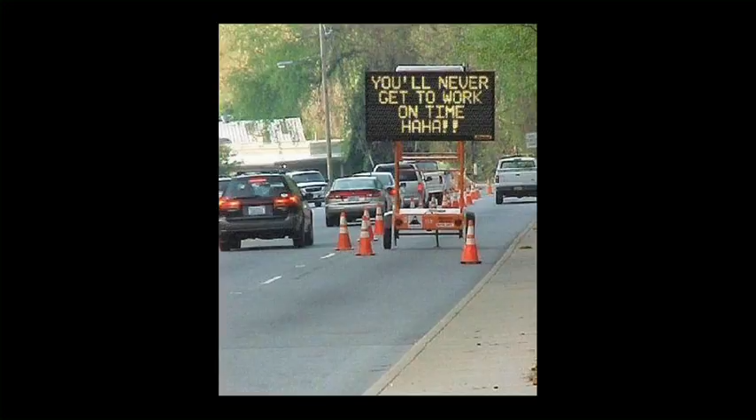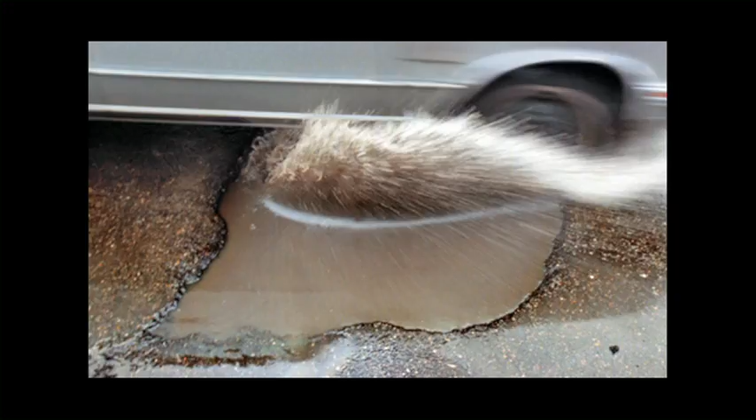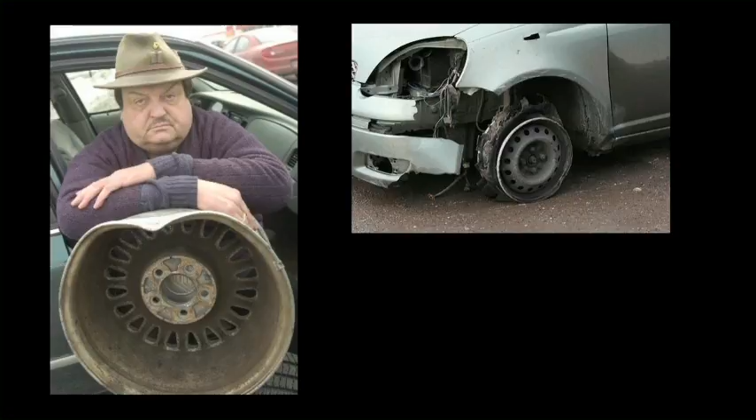Up until 2009, there had been a couple of fairly high-profile claims against road authorities for potholes - damage to vehicles, accidents on bicycles, things like that. But it was a fairly lengthy court procedure to go through. I think in 2009, 2010, where the damage was more tires, rims, some minor vehicle damage, people realized they could claim from municipalities, road authorities, and the claims started coming in. The authorities were suddenly saddled with all these claims, and they admitted responsibility in many cases and didn't even argue - just paid up.

Not at all. We have seen in literature that the UK, for instance, and Australia, over the last couple of years have also experienced extensive development of potholes, and in monetary terms far more than we actually need to put in to repair them. So it's not unique, but it's a legacy of cutting back in funding over the years in terms of preventative maintenance. If you Google potholes, you get quite a few million hits immediately, but they tend to be predominantly from America and Europe. And the origin or cause of potholes in those environments is somewhat different to ours.

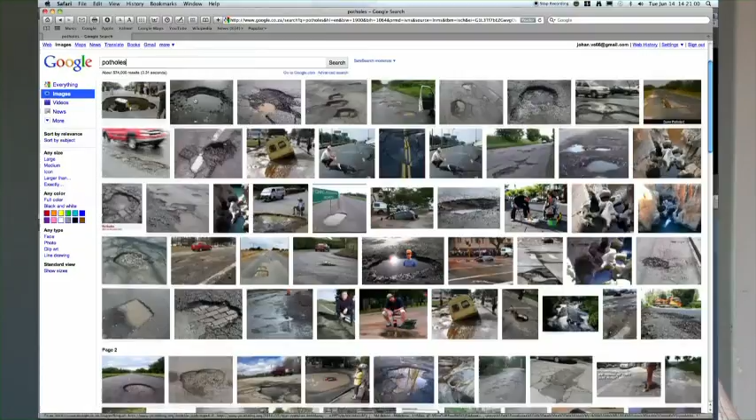There, where you have the so-called spring thaw at the end of winter, when the frozen water in the road starts thawing out, it affects the road, softens the material, weakens the road, and heavy loads on that type of material lead to potholes. That's not the kind of pothole we get in South Africa. The whole road network, right from the early 40s, 50s when they started paving it, we use much thinner asphalt and thin chip seals, or spray seals as they're called. In Europe, it's not uncommon to have 100, 150 millimeters of asphalt surfacing on a road. Here, the maximum would typically be about 50, often 25 to 40. So our pavement structure is very different, primarily because of the drier, warmer environment - we haven't got the cold conditions in winter.

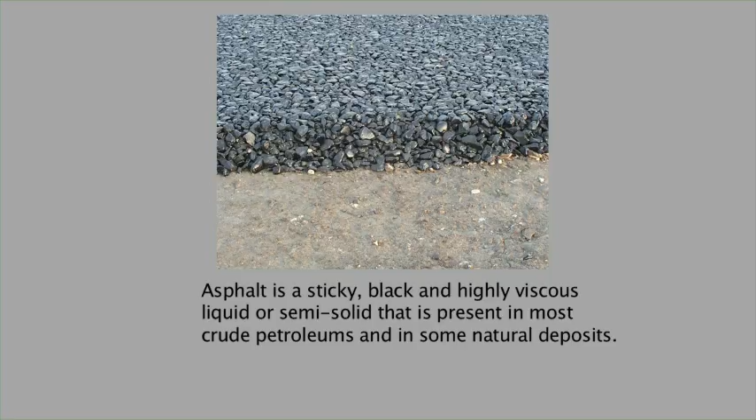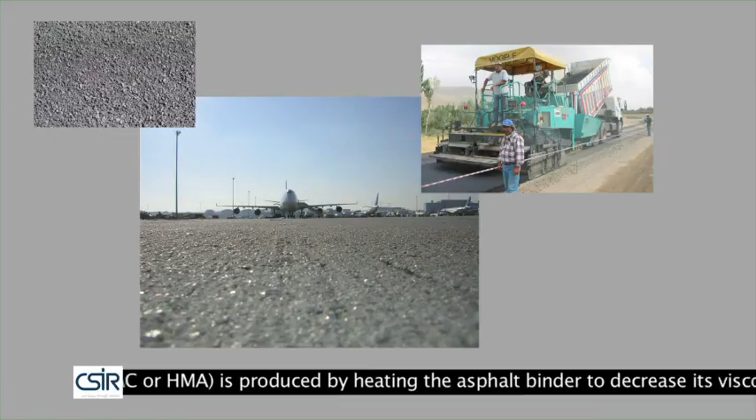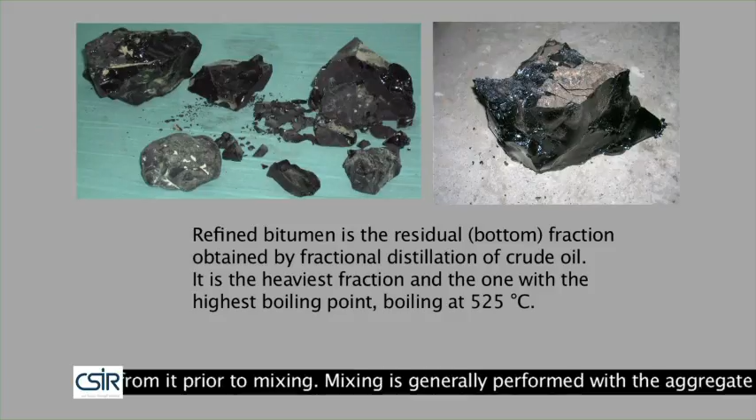Asphalt roads are paved with a mixture of stone and bitumen, and there can be two kinds. There's asphalt, which is made in a hot mix plant at high temperatures and placed in the road at high temperatures - a combination of usually aggregate, sand, bitumen, and some cement or lime or something. The other kind of paved road is the thin bituminous surfacing, where you spray a layer of bitumen on the road, put stone on that, roll it in, and that's basically it. Sometimes you can have two different size stones to make the seal.

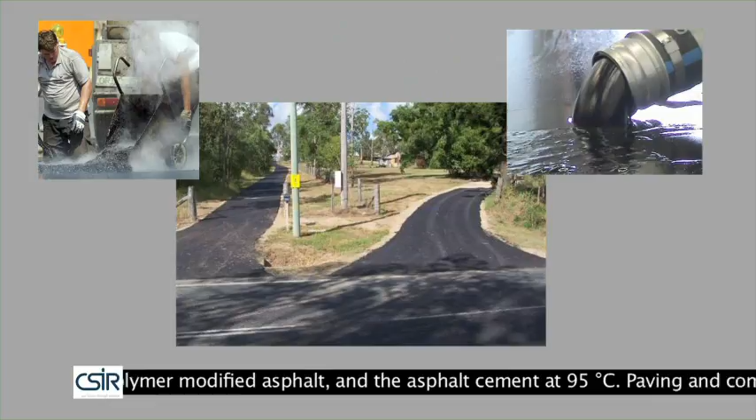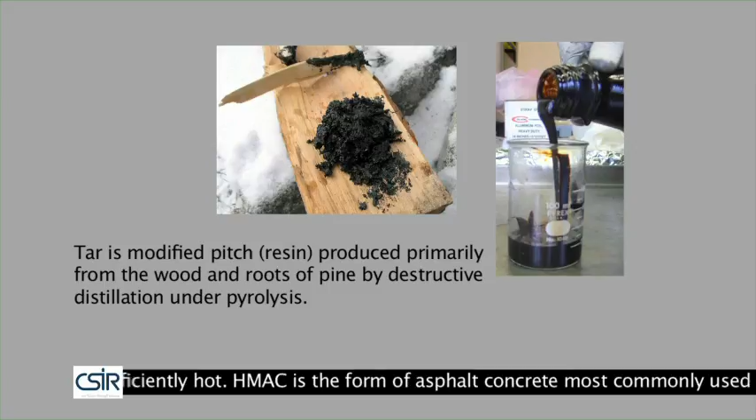Tar we don't use anymore - it's basically banned for use on roads in South Africa. It is carcinogenic. It's derived from coal, whereas bitumen is derived from oil - that's the main difference. And then concrete roads: in South Africa, we've probably got maybe 4 or 5% maximum of concrete roads, a totally different process, which is cement, aggregate, and sand mixed together.

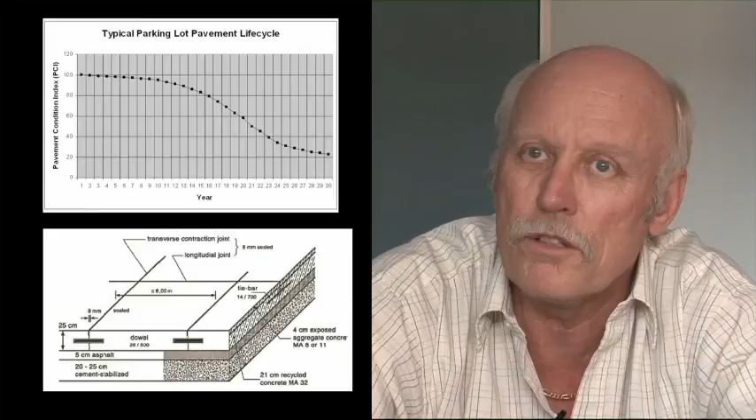A good asphalt road is designed to last for probably 12 or 15 years with minimal maintenance, if the pavement layers are correctly selected, the materials, the pavement balance is right, the asphalt is right, and everything's constructed properly.

If they're not maintained, the asphalt starts drying out and shrinking. It goes from the darker blackish color to gray, and becomes stiffer as the bitumen volatiles evaporate. It gets stiffer, which allows it to deflect more under traffic, and generates fatigue cracking from this repeated bending up and down. That's the cause of cracking in an asphalt road, which ultimately leads to potholes when water gets in the cracks.

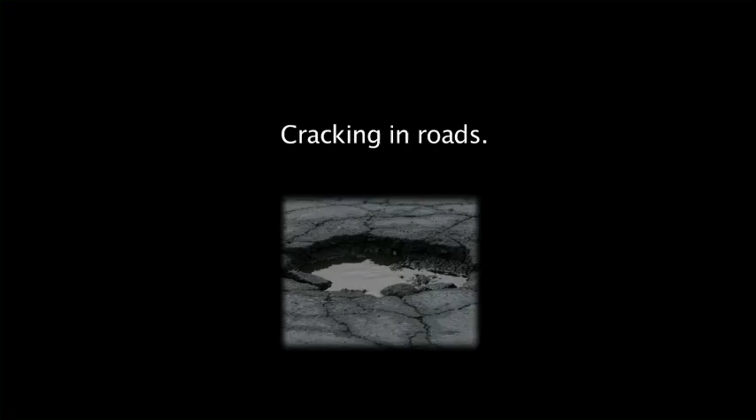There's a whole lot of different ways that cracking forms in asphalt. Obviously, one of them is if you've got poor drainage. Next to the road you get ponding of water. It could be from irrigation or seepage from a stream or dam, or even often in informal settlements, just the general drainage ends up seeping into areas next to the road.

If that water lies there, it can soak into the road, the structural layers beneath the asphalt, weaken those layers, so your deflection under traffic is even higher, so the fatigue cracking is quicker. It's really like bending a wire backwards and forwards. You bend wire, it gets hotter and hotter, and eventually it'll break. That's what happens to a road.

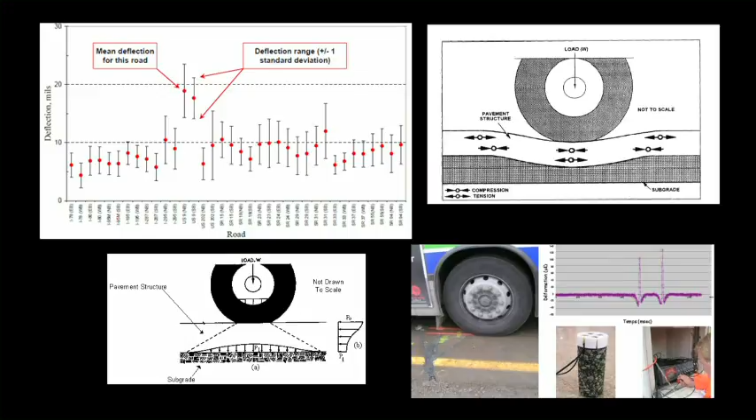Under every vehicle, there's some kind of vertical movement. A really good strong road may be 0.2 or 0.3 millimeters. Other roads may be 0.8, 1 millimeter. We've measured even 2.5 millimeters in some very light pavement structures. As a vehicle goes across, the effect of that movement on the bitumen or asphalt is exactly like the effect on a wire, and ultimately it will crack.

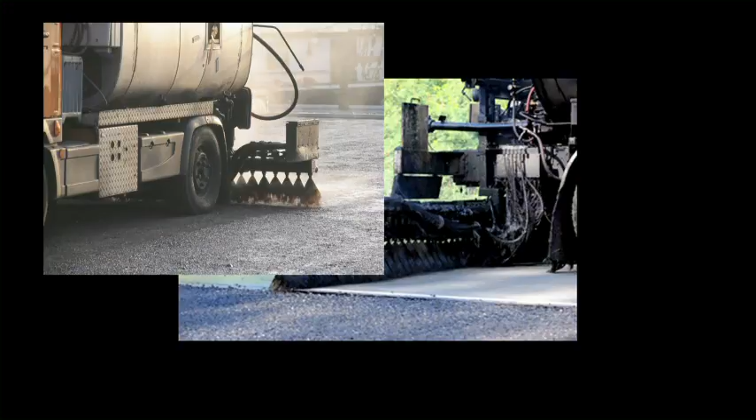Aging affects bitumen, as I mentioned earlier. The bitumen is placed hot, refined and made at the factory, delivered to site at anything 130 degrees upwards. It's sprayed on the road and it cools down. Immediately it starts cooling and oxidizing just from the oxygen in the air and the ultraviolet light. It starts aging, losing the volatiles which keep it flexible, a lot of the chemical compounds which actually evaporate with time.

This causes stiffening of the bitumen, whether in a thin bituminous seal or an asphalt, which causes stiffening of that layer, making it more prone to fatigue.

When we don't have some particularly good materials for the pavement structure, it's not uncommon to get a material that you can improve by the addition of cement or lime, and that's what we call stabilization. You can make a weak material almost into a weak concrete, much stronger than we need in a road in many cases. When we add the stabilizer, be it lime or cement or a whole lot of other things, it absorbs water from the layer to hydrate it and causes some formation of cementitious products, which causes shrinkage of the layer, which causes cracking. Frequently driving on a road, you'll see this typical block cracking.

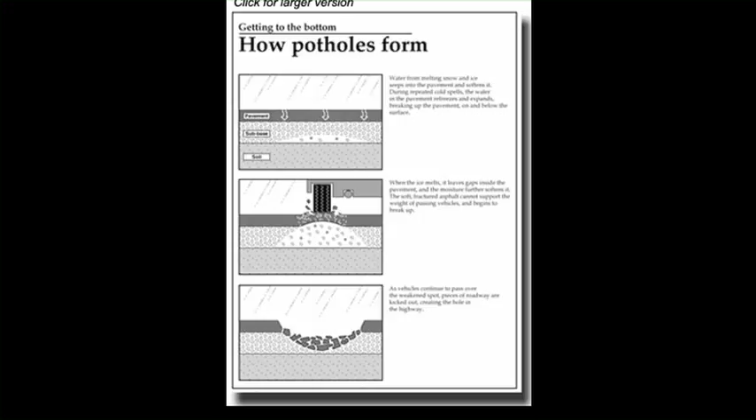If those cracks aren't sealed, the water can get in. What we do know is that those cracks, even in the subbase, which is one of the support layers, above the subbase you'll have a base course, which could be a G1 very good stone base, and then your surfacing. Those cracks can actually reflect right through the G1 and through the asphalt or any other surfacing and appear at the surface. That's when they need to be sealed with a special bitumen rubber or something to stop water getting in. If water gets in, it runs through the crack, through the base, through the sub-base into the subgrade, and you're back with the weak support layer.

This is a big problem, traffic. Over the years, from 10, 15, 20 years ago, we had sort of 2-3 axle trucks. Now we've got literally hundreds of these 7-axle interlinked trucks. The ones traveling on the main roads, the weight is controlled pretty well, so they tend not to be overloaded. But the ones on the back roads and less important roads, where there's no overloading control, tend to be overloaded, and the effect of an overloaded axle is extremely detrimental to roads.

The damage is a little formula: the weight of the axle over 80 kilonewtons, which is our standard legal axle load limit, to the power 4.2. So any overload is increased to the power 4.2, which has an enormous effect on the way that road handles that load.

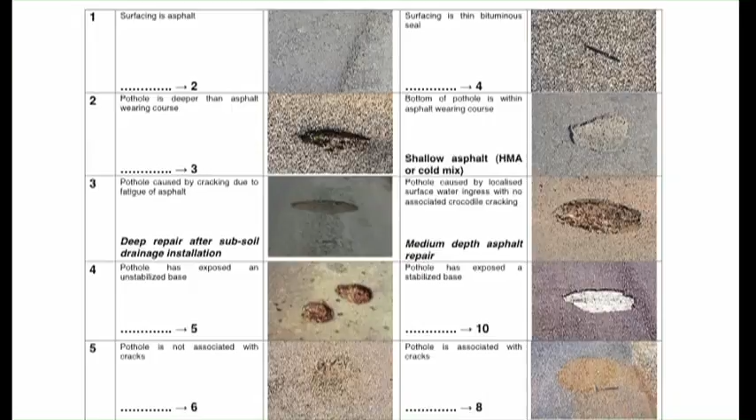When we were doing this document, we noticed there were different kinds of potholes in asphalt and thin bituminous surfacings. Thin bituminous surfacings in South Africa probably make up 95% of the bitumen paved road network. Apart from the main metropolitan areas and the national highways, the N1s, and even not all of the N1, but most of it, those are paved with asphalt.

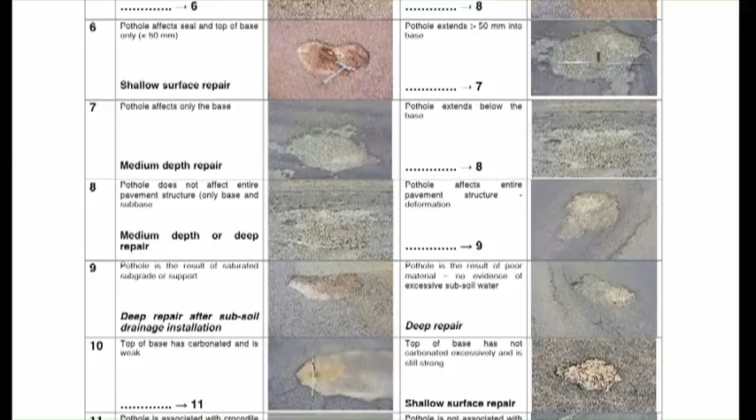Everything else in this country is paved with what we call thin bituminous surfacings, and these vary from 5 millimeters or so for a sand seal up to probably 17, 20 millimeters for a double chip seal with a slurry on top. So they do differ in the way they fail and perform from an asphalt. A typical thin seal, a single seal, should last 7 or 8 years before it needs some kind of maintenance. A double cape seal, which is a seal plus a slurry seal, should last 10 to 12 years, compared to an asphalt, which is probably looking at 12 or 15 years. So they need more maintenance.

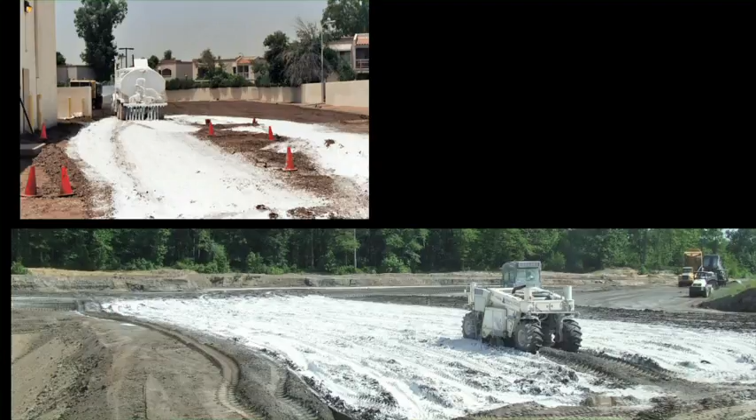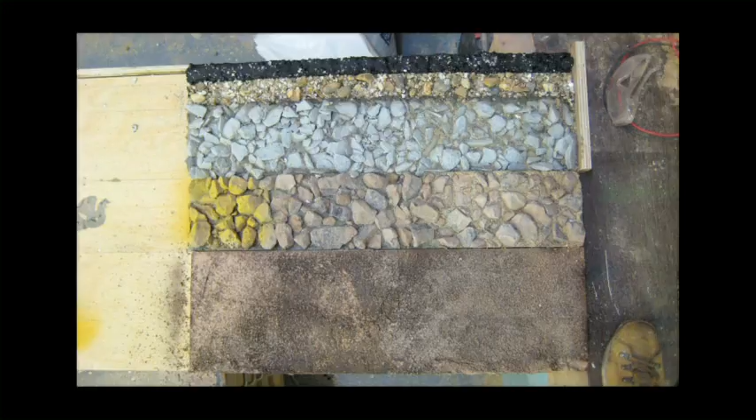As mentioned, often the top of a stabilized layer becomes weak. Essentially, cement or lime, which you use for stabilization, are made by burning limestone, which is calcium carbonate, generating carbon dioxide. You're left with a calcium oxide or hydroxide, which is a stabilizing material. That is naturally unstable at the current ambient environmental conditions and wants to absorb the carbon dioxide back into it and go back to the limestone.

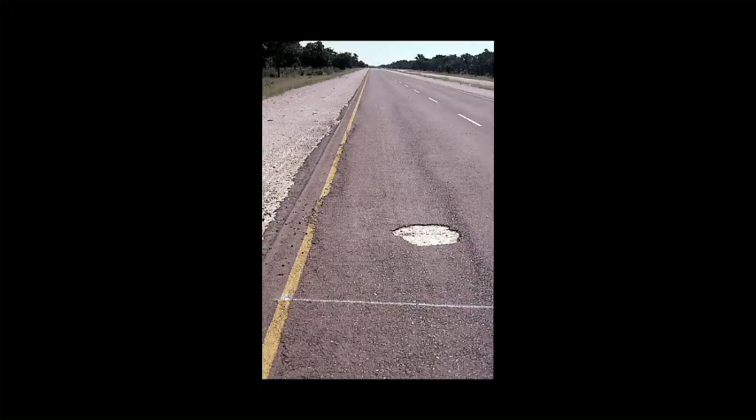So during construction, one has to be very careful that this process doesn't take place too quickly. What we find in many cases is that the top layer does carbonate, and so you get this weak laminated layer on top. Again, there are ways of overcoming it in the construction process, it can be skimmed off with a grader before sealing, that type of thing. So there are ways of handling it. It's not a major problem, but if it's not seen in time and handled, you can get this lamination or thin layer beneath the seal, which is prone to crushing under wheel loads. Even the sealing process alone, just rolling the chip into the top of the base, can break it up. So it can be a problem, and it will lead to potholes.

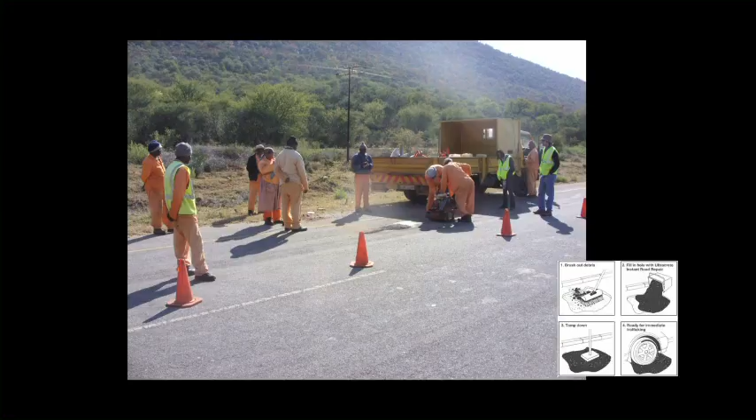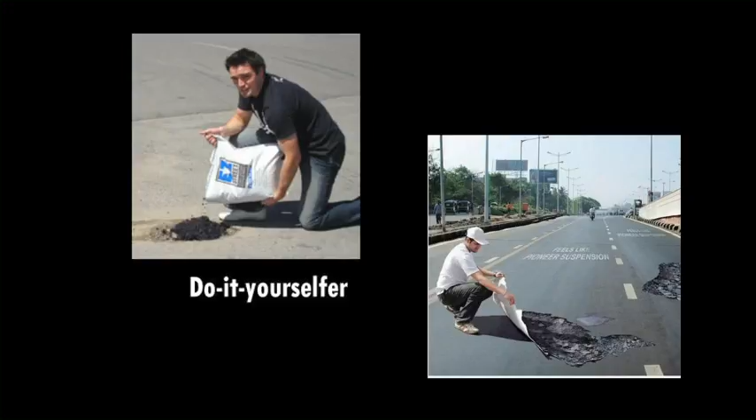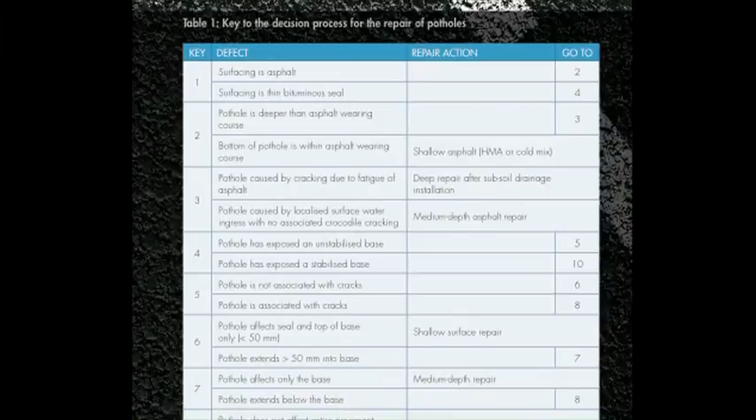This is one of our biggest problems: where potholes are seen, teams go out and patch them, but they're not actually treating the cause. All they're doing is superficially fixing the pothole. If the cause is not attacked and solved, the problem is going to fail again, or the pothole is going to form again. This is probably the biggest thing that worries the communities and the public, as they see the pothole repair teams over and over at the same potholes, patching them over and over again. One of the main objectives of this guideline is to identify the causes so that when the pothole is repaired, it's repaired properly, and we don't have to keep going back over and over.

It costs a lot of money, takes a lot of resources, wastes a lot of materials. A lot of potholes are not done properly, they won't last. But there are other areas as well, it's not just these. Obviously, if there's water as the problem, you need to stop that water, and that often entails the installation of subsurface drains to cut off the water before it gets into the road.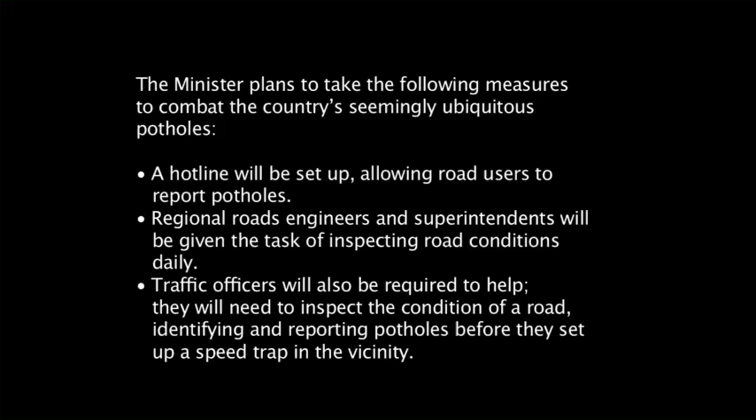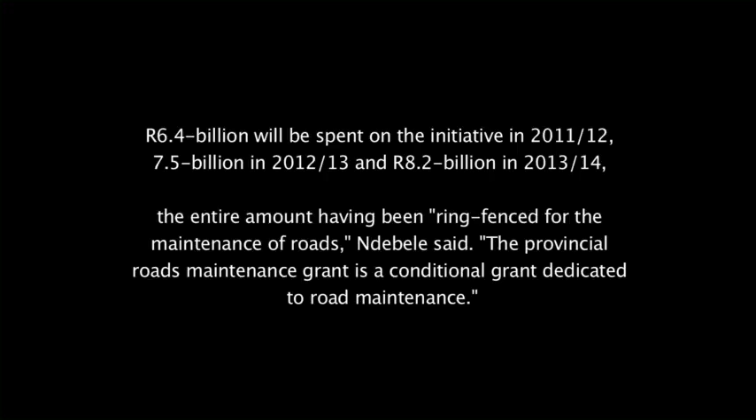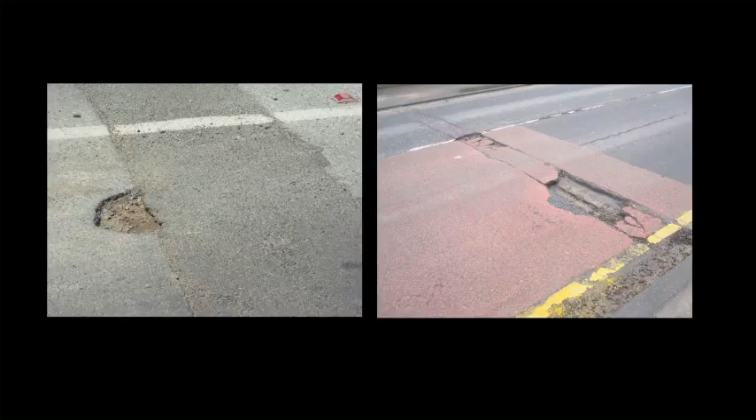We get other areas where trench reinstatements, municipal roads particularly, where a service provider will dig a trench across the road to put in pipes or wires or whatever. They're not normally backfilled and constructed to the same standard as the road, so you get some depression, the trench collapses a little bit, water ponds in that, soaks in, softens the road, and the trench fails. You frequently see potholes along the side of trenches where the join between the trench and the old road is not sealed properly, water goes in there. So there are all these areas.

Another big problem is people putting in a heavily stabilized material, almost a concrete, just by mixing some soil or aggregate with cement, far too much. We shouldn't use more than about 3%. You end up with essentially a concrete block in the road. This is going to behave differently under traffic, it's going to rock, it's not going to deflect to the same extent as the traffic, so there's going to be movement at the edges. When it starts opening, cracking around this block, water gets in and problems start again.

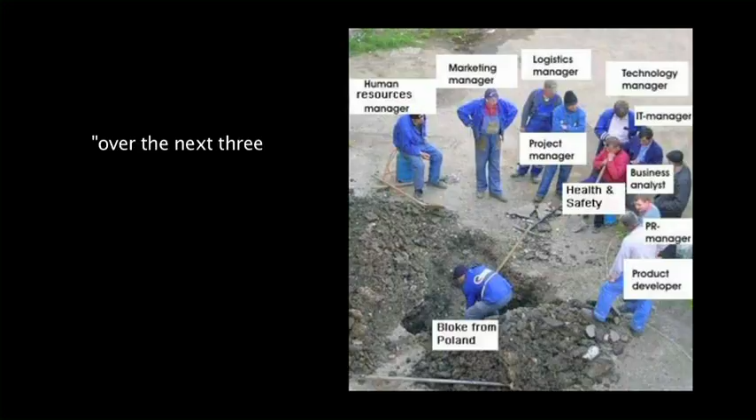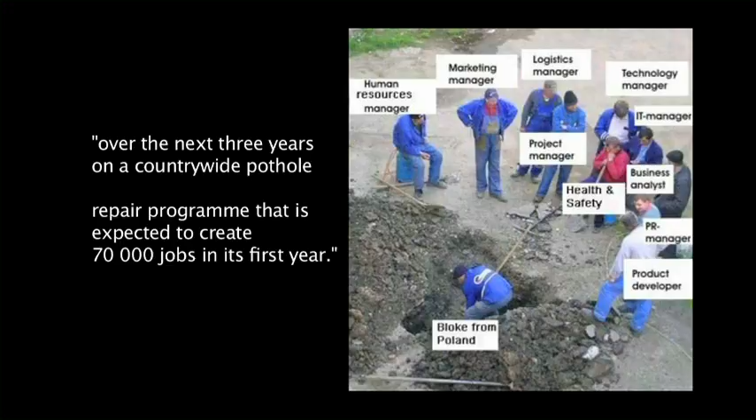So there are a whole lot of areas of repair that, if not carefully controlled, will just lead to bigger problems. The Department of Public Works is trying to increase the number of labourers on pothole repair jobs to create jobs. It's a massive opportunity to create lots of jobs. They're looking this year at creating something like 70,000 jobs. A typical pothole repair team would be anything from 10 to 15 people doing different parts of it: compacting, digging, putting in the asphalt, whatever.

There are a number of mechanical devices, machines, whatever you want to call them, that go around with 2, maybe 3 people and literally repair a pothole on site. It does not create a lot of jobs, but it's quick.

You can probably repair a lot more potholes in the same time, but it does not necessarily solve the underlying problem. You're just filling in the hole. It's like putting a plaster over a problem. You're not curing the septic wound underneath it.

There are a few basic rules. In the guideline document we've highlighted, there's a chapter on repair of potholes, and depending on the cause, there'll be different kinds of repair. The preliminary treatment is really the same for all of them: you identify the pothole and mark out the area to be fixed. It should not just be the pothole, because water has weakened the area around it, and there's probably cracking associated with it. So it needs to be much bigger than the pothole, and it needs to be marked out.

Then one comes on site, you open it up, clean it, cut it out - typically we're recommending a diamond saw, but teams can do equally good jobs with picks. Sometimes you need jackhammers if it's a stabilized layer. You need to clean it out, get all the loose material out, get to where you've got the original unaffected road pavement, and then start doing the repair. So the preliminary work is actually probably the most important part of it.

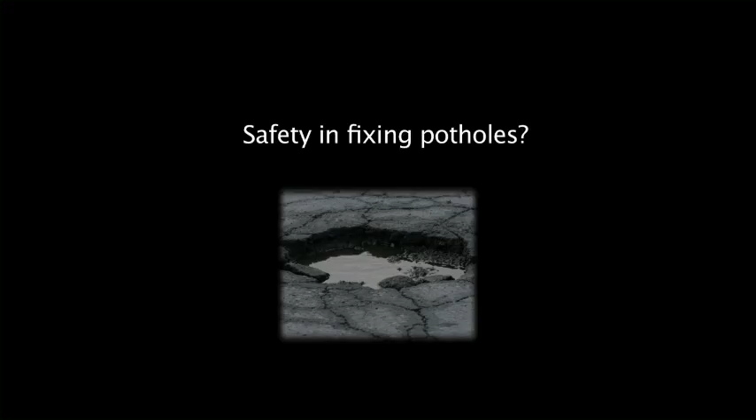Any road project obviously has serious safety implications - people working on the road, fast cars, big trucks. We've highlighted some aspects in the document, though it's not really a safety document; there are other documents with standard procedures for that. But there are things we've seen on a lot of pothole sites where the cones are so black from bitumen and stuff you can hardly see them, and the safety jackets are dirty and don't show up properly. So we're highlighting a few basic things: your flagman should be properly trained, the signboards should be clean and the right boards - you often see the wrong boards. That aspect would normally be under pretty good control of the contractor anyway.

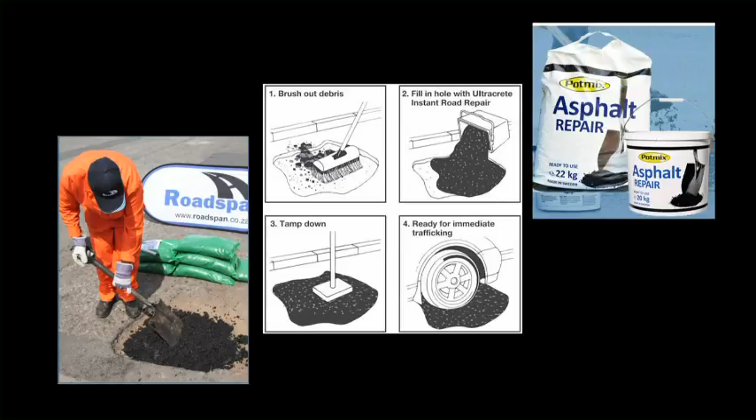Typically the pothole would be filled with different layers, and the top layer would be cold mix or hot mix asphalt. It's not unusual for potholes up to 100, even 200 millimeters deep, to clean them out and just fill them with hot mix asphalt, but it's expensive. It's far more cost effective to put a layer of gravel, stabilized layer, or treated material in first, and just use the asphalt for the top 50 to 75 millimeters.

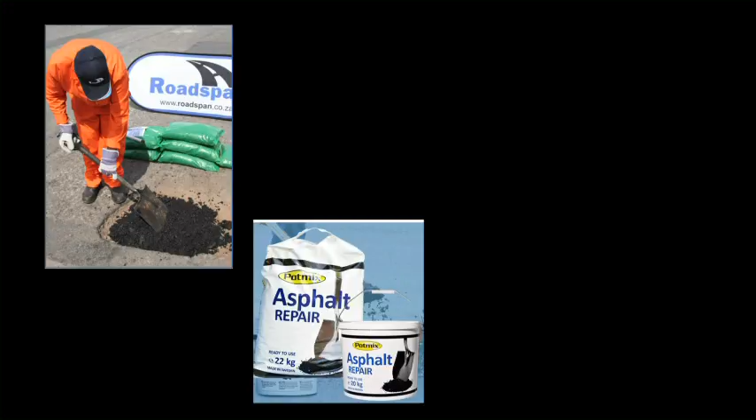We get two kinds of asphalt: cold mix, which comes in bags and works particularly well in rural areas, and hot mix, which is probably more cost effective in urban areas if you've got a plant - a lot of the metros have their own plants and can make it. The disadvantage is it's delivered in quite big quantities, and it has to be constructed, put in the hole and compacted before the temperature drops below, depending on the mix, around about 135 degrees. After that it's difficult to compact, you don't get the density, and it remains permeable. So in urban areas they tend to look at hot mix asphalt.

In rural areas there's no way you can actually deliver a truck of half a cubic meter to one pothole somewhere, so cold mix is much better. It comes in bags - open the bag, put it in the hole, and just compact it.

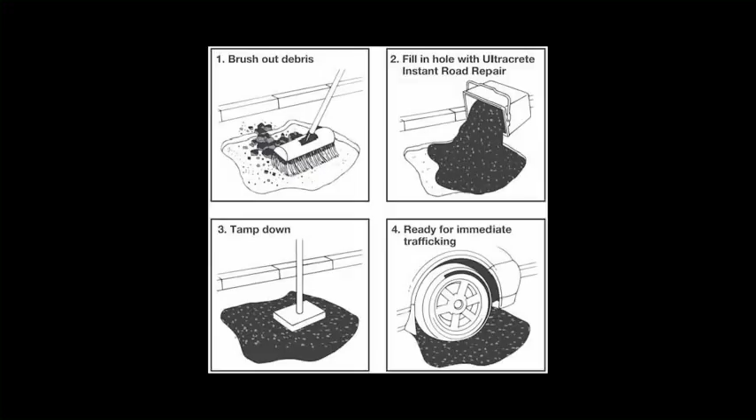The worst thing you can do, and we see this commonly, is fill a pothole with material from the side of the road. It's often done as a temporary measure until they come to repair the pothole properly, and usually happens once a pothole gets to a significant depth - probably 100 to 150 millimeters - when vehicles start feeling it. The problem comes when it's time to patch it properly: that material is not always removed. It's cleaned out up to a point, leveled off, and they put cold mix on top, but you've still got this really bad, poor, moisture-sensitive material underneath it. So it's not a good idea to use these typical materials from the side of the road - they will lead to later problems.

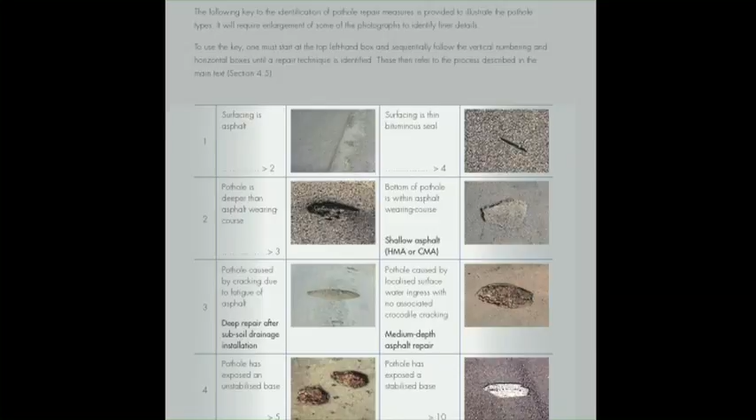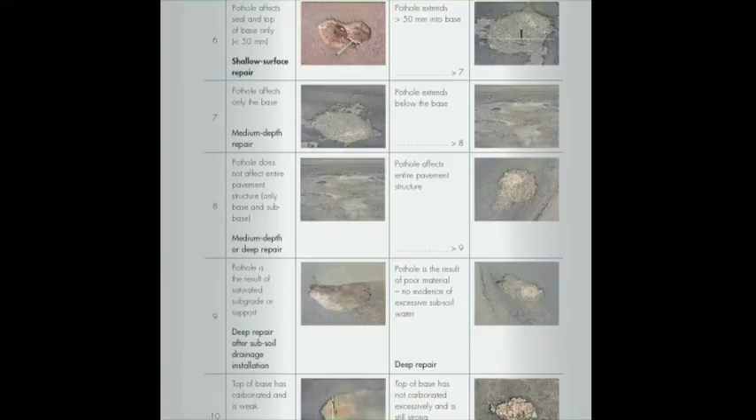The pothole guideline, when we're doing it, identifies that you need to relate the type of repair to the cause. In the guideline, there's a decision key process where one looks at a pothole and makes a number of decisions, usually a yes, no, or a choice of two, and you move through the key based on these decisions each time.

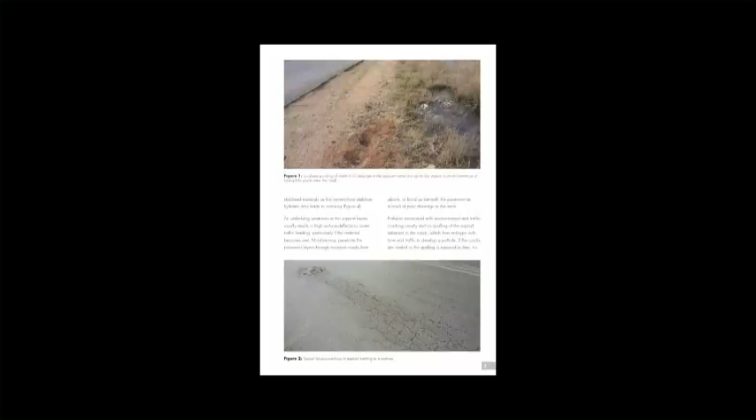There are 11 steps in the key, and at various points you'll either be moved to the next step or reach a solution, which could be a shallow repair, deep repair, or asphalt with a deep repair with subsoil drains. The document defines 6 major types of repair, and the deep ones could or could not have subsoil drainage with them. Subsoil drainage can be a problem because it's expensive and needs to be properly designed, requiring engineering input to make sure it's effective.

Essentially the repair methods in the document for each of those shallow, medium and deep asphalt, and shallow, medium and deep thin surfacing, there's a laid out method, a process to go through how deep you need to go down, what you need to do for each layer, and basically how to repair it.

The classification of potholes in terms of the type of repair - training for that is being done through the courses we're running with the South African Road Federation. They actually repair, with hands-on labour teams who will be doing the repairing. That training has been done through the Asphalt Academy, where they'll go out and do manual pothole repairs. So there are 2 different aspects to the document: the classification, and the repair.

In the document, we go through a fairly rigorous quality control procedure covering a number of things. Firstly, the materials used need to comply with specifications, so whoever's doing the repair needs to have stockpiles of material of known quality that they can deliver to site quickly as soon as the pothole is noticed, to repair it properly. It's no good just putting the material in the road - it's got to be compacted to similar density as everything around it.

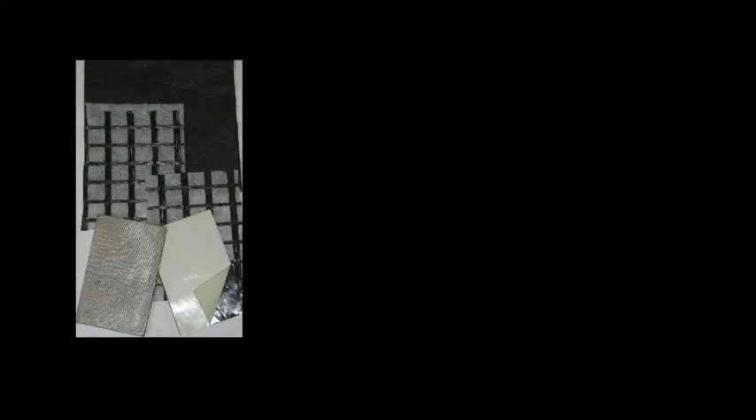One of the ones we're recommending, based on a number of observations, is to put what they call a geosynthetic strip over that joint, tack it down, and it seals and waterproofs that strip. So even if it does open slightly, it's still a waterproof joint. It's fairly simple things like that.

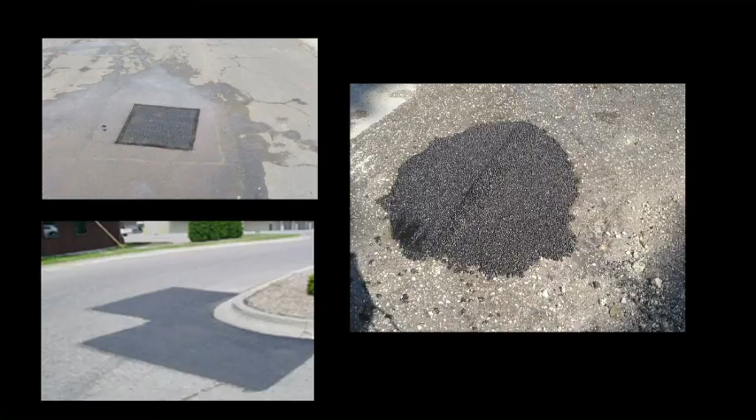The last thing discussed under quality control here is aesthetics - the job needs to look professional. We don't want lumps of black bitumen in a grey mess. It needs to be nice, square or round, although round is very difficult to make, so we're suggesting square, rectangular or diamond-shaped patches in the document. They just look more professional and better engineered work. So that's essentially the quality control.

Up to now, that hasn't been a major thing in pothole patching, but hopefully now, through the courses, people are saying that's what we need - we need to check that quality.

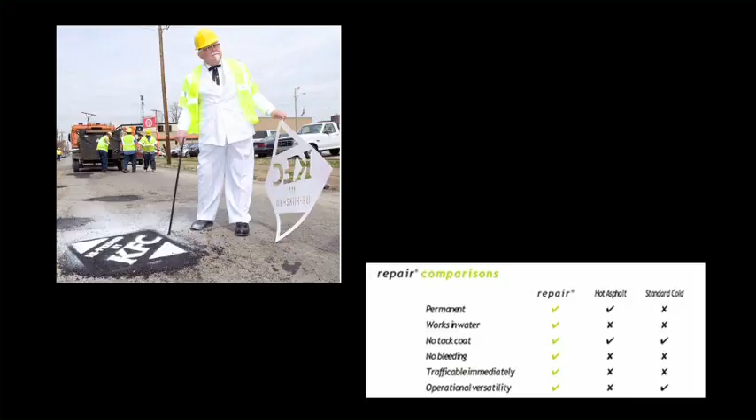One of the problems with quality as well is that it needs to be monitored at different stages. Compaction in a hole has to be monitored before the next layer comes in, whereas adhesion of a geosynthetic strip to the surface, for instance, probably takes 3 or 4 weeks to actually bond and stick down. So there are different times that different things need to be controlled, and that's one of the dilemmas now - who controls compaction, the contractor, or do we have an engineer or inspector on site the whole time? This is one of the things that needs to be sorted out - we're trying to have a sort of standard record where the contractor will mark things.

One can go back later and check if he did try to pull the wool over everybody's eyes, which could or could not happen. But we're also saying the contractor should give some kind of product performance guarantee - that if he patches the hole, both the workmanship and the cold mix or hot mix he's putting on top needs to be guaranteed for a year or two years or whatever they decide in the contract. That'll put the onus on the contractor to make sure the job is done properly.

This is not a new thing. Over the years it's becoming more and more used. So it's not unusual, but this does make sure that the contractor - he may charge a little bit more initially, but you won't have to go back three or four times.

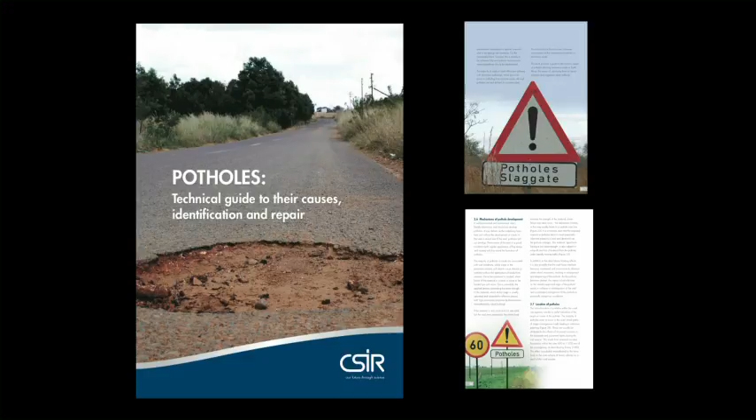What we're suggesting is that the technical guide should be implemented by an engineer, or at least somebody with some engineering background, a qualified, experienced road inspector, something like that. That will make sure that the cause and the type of pothole repair required is identified correctly. So that's going to solve one of the problems. The engineer would normally specify the kind of repair, go out and do it. Whether he will come back or somebody else will come back to check the quality - the engineer could do it, but that could be quite costly that way. Or somebody else could be appointed, specifically an independent assessor, to go out and check quality. So there's different ways of doing this.

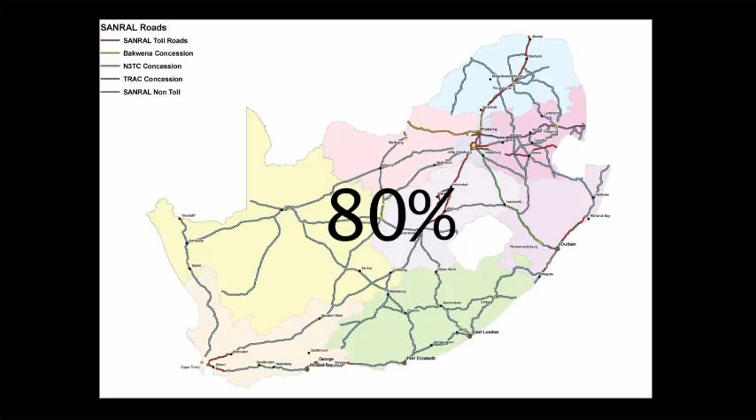It's interesting because if we look at the road network in South Africa, I think more than 80% of the road is long past its design life. A road is designed for 20 years. If you get 25 years, you're probably doing well. There are roads 50, 60 years old that are still there. They're still structurally sound, but they're giving problems because they haven't been maintained, that's all. The cracks have not been sealed.

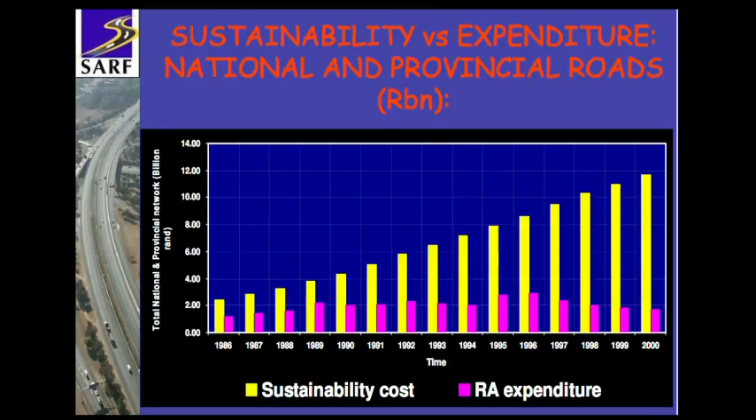The length of road built in the last 10 years is probably minimal in terms of the overall 200,000 kilometers of paved road that we've got in South Africa. So our biggest challenge is this aging network. And we've seen the asset value of the paved road network is probably around about 800 billion rand - that's what it costs us to replace the paved roads now.

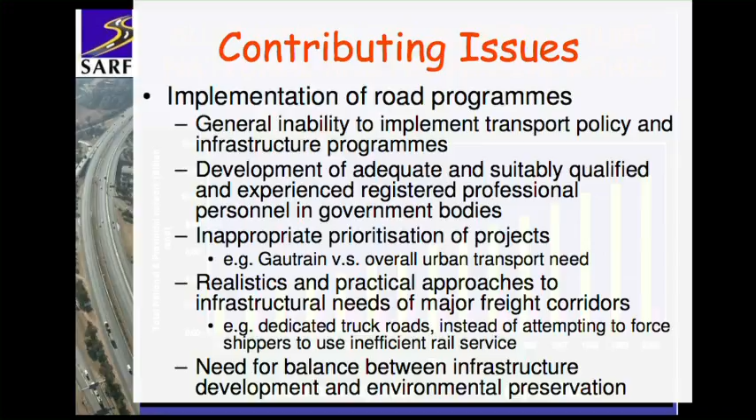We should be spending, if we say it needs maintenance every 7 years, probably 100 billion plus per year on maintenance. And currently I think we're spending around about 30 billion. So we're falling behind.

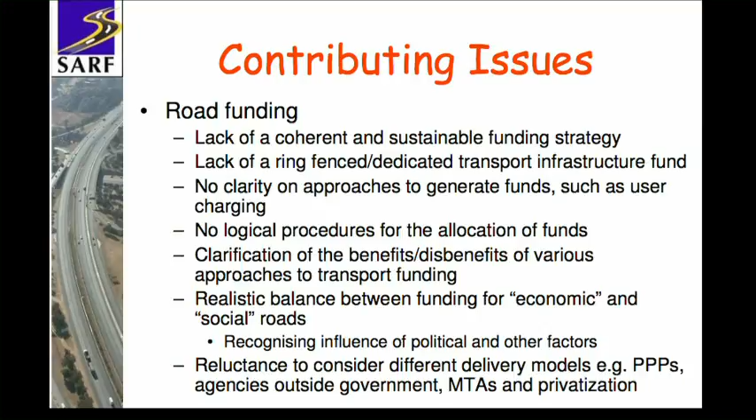And this is exactly what I said earlier - in Australia and America, the problem with road maintenance is there's no immediate political benefit. The benefit is only shown 10 years' time when you've still got a road. But by then most politicians and managers and people have moved out of the system. It's not their problem anymore. These are the challenges one needs to overcome to be able to spend some money on something that you're not going to see any benefit on.

Yeah, obviously budget's a big challenge. I think everybody recognizes the problem now. I've actually been down to the Parliamentary Portfolio Committee on Transport together with the major road authorities and people, and the chairman of that portfolio committee was really interested in what we were saying in terms of budgets and amounts of money needed and what's causing the problems. So I think at least now the politicians understand the problem. That's the main thing.

I mentioned just now, we probably need more than 100 billion a year just to keep up, let alone kill the backlog. Whether that'll ever materialise is another problem. It's got to come from somewhere, yeah.

Most university engineering courses have a transportation or a road design module. It's fairly superficial - I think it gives them the basic understanding, but it's really the structural design of roads and the rehabilitation. There's very little in terms of maintenance, hands-on type things like pothole repair and stuff. There are courses - Road Federation runs a number of road maintenance courses.

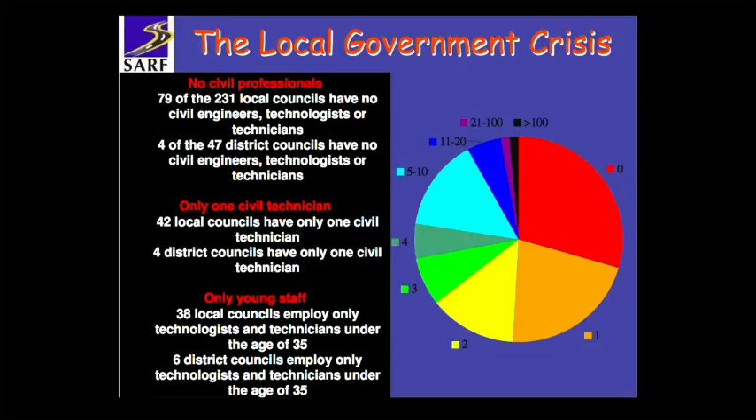We all know the skills gap currently in South Africa, where there's a pool of plus 50 sort of white engineers, then there's a fair gap, and then a pool of probably minus 35, minus 30 black engineers. A lot of them are Technikon trained, university trained, so they just don't have the experience yet to do what the older generation is doing. So there's this skills gap, and that's our biggest challenge - to transfer the current skills down to the emerging engineers. Hopefully books like this document will help in that respect.

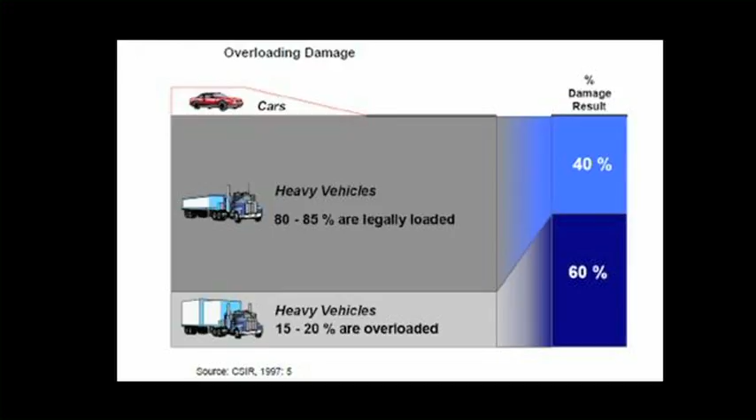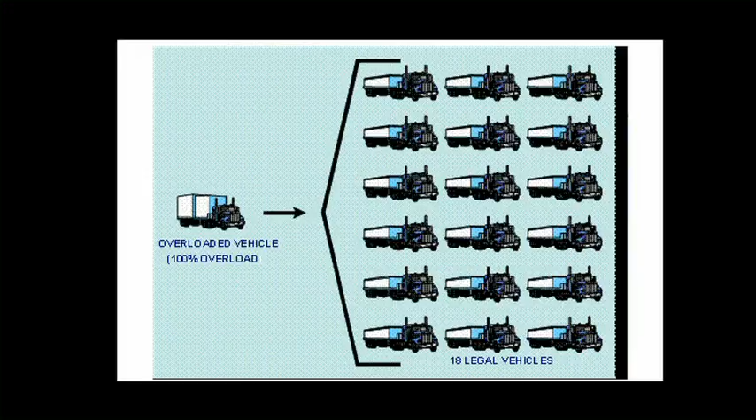Well, that's a sore point. Now, over the last probably 15, 20 years, there's been a proliferation of heavy vehicles, large trucks on our roads. Everybody sees it, everybody complains about it. In the morning traffic jams, there's big 7-axle trucks stuck in the middle. The movement of freight from train to truck has just increased exponentially. My personal opinion, and I think a lot of people agree, is that we need to get that freight back onto rail.

We need to upgrade the rail network, get as much freight as possible back onto rail, and keep the roads for light delivery and commuter type traffic. We know that you can never solve the congestion problem by making more roads, more lanes. It doesn't solve the congestion problem, it just attracts more traffic. So the only way is to try and get the slow-moving heavy vehicles off the road.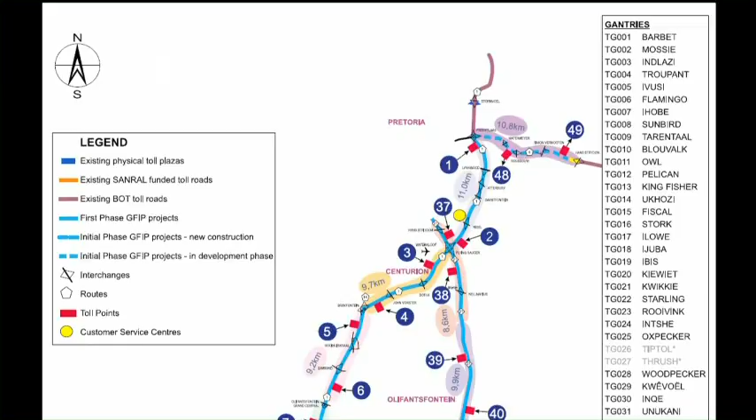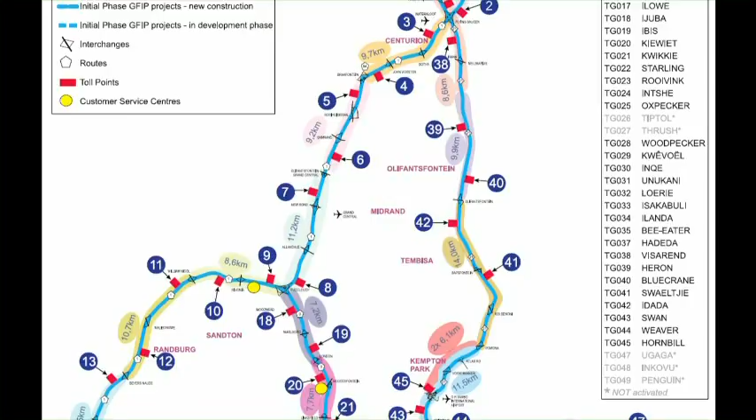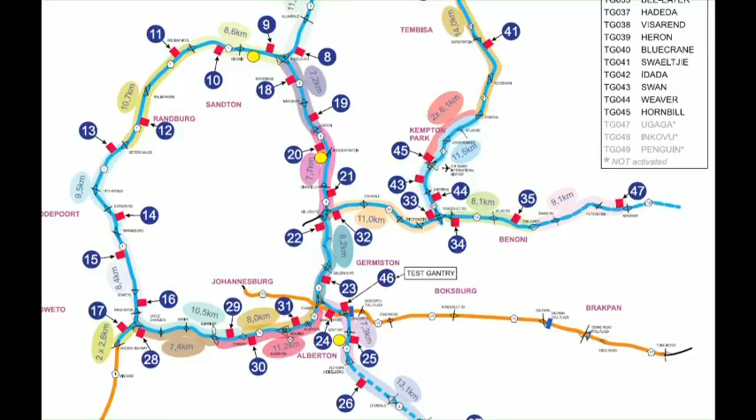Yeah, I think the GFIP, the Gauteng Freeway Improvement Program, is certainly going to alleviate some of the congestion problems on the highways. It's not going to alleviate the congestion problems getting off the highways, because those roads, once you get off, have not been upgraded in most cases. So the problems are going to be at the interchanges. But at least with 4 or 5 lanes, the traffic will move a bit quicker. So I think that's a good step.

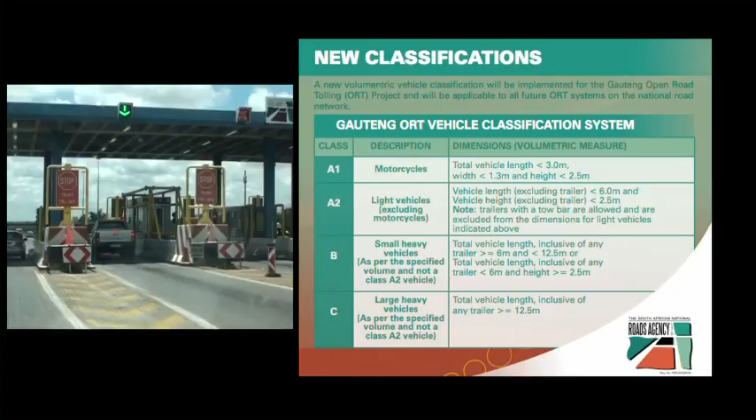In terms of the tolls, probably at first there'll be a bit of resistance, but when tolls first started in the late 70s in KwaZulu-Natal, people were taking all the back roads, but they soon learned it's actually much quicker and cheaper to go on the toll road.

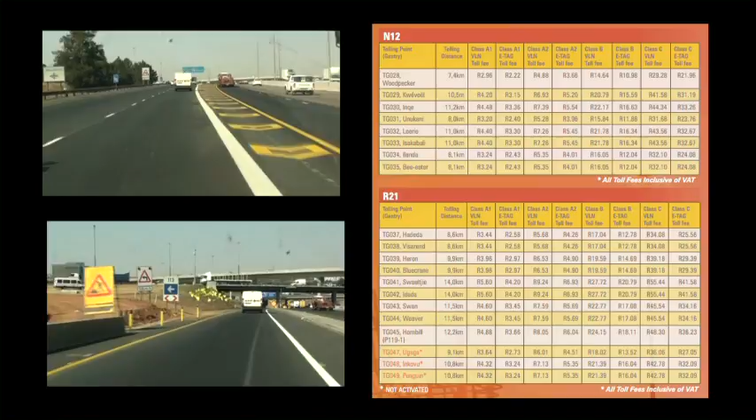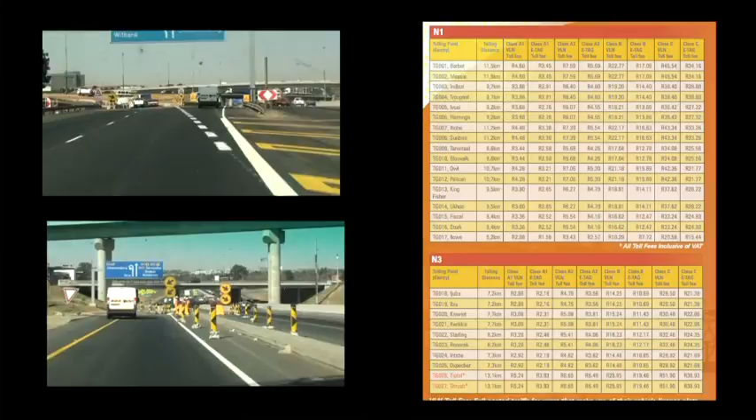Yeah, the Gautrain certainly is going to alleviate a lot of the congestion in peak hour between Pretoria and Joburg. I think that's a great system. I personally hope and probably think that it will be expanded at both ends into ultimately an underground system for Joburg - that's the way it's got to go. Joburg needs some kind of mass transit system like that, so that's a good starting point. And probably Pretoria down the line as well, but that's open to conjecture.

The first thing we need to do, and I think government has recognized the problem now, is address the pothole problem, which is a result of neglecting road maintenance over the last 10, 15 years. Say 15 years ago, every province had a pavement management system where every year data was collected, put through the system, and it came out saying this road or that road needs some kind of maintenance. It allowed budget allocations or budgeting calculations. Whether they got the money or not was another problem.

But at least you could see how much money you needed and how much you were getting. In the last, say, 10, 12 years, those pavement management systems have all gone. The only one left is Sanral - they've still got an effective one, and you can see that in the standard of their roads. The Western Cape has also got a still functioning pavement management system. No other province has, to the best of my knowledge. And that's why we cannot predict what roads need maintenance, where, when, or how much it's going to cost. So until we get pavement management systems going again, so the budgeting can be done correctly and say we need so much to maintain our roads and to catch up the backlog, we're going to have a problem.

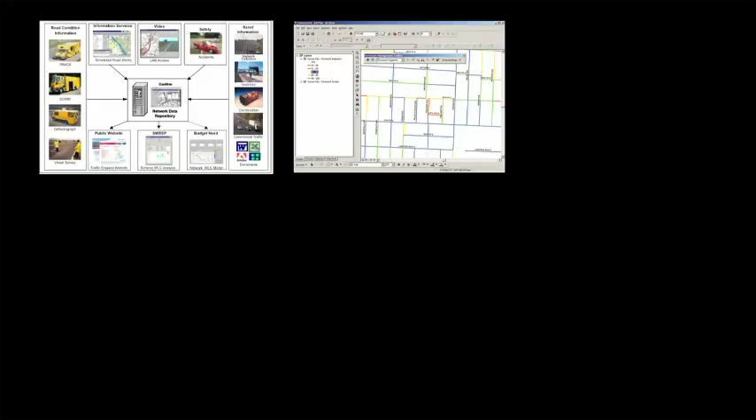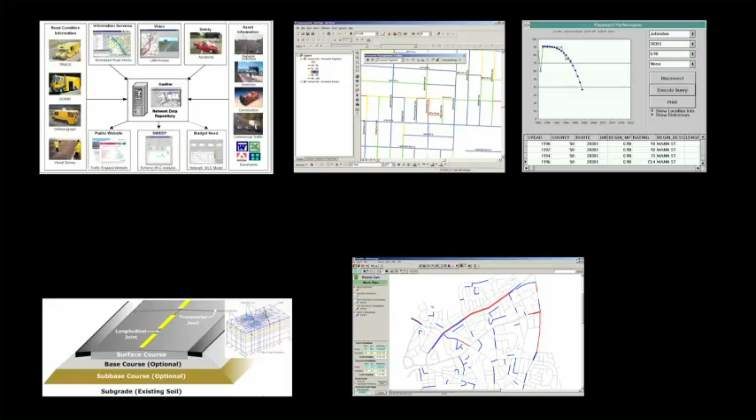So the future, I think, is basically that one needs to reinstate those systems. They're fairly simple things these days - originally, in the old days of big mainframe computers, it was a major exercise, but with PCs on the desk, and even your cell phone in your pocket, you can probably run one of these systems these days. So I think there's going to be an increase in those, which hopefully will allow better budgeting and more preventative maintenance, because without that preventative maintenance, we're going to lose our road network with time.

As for the trucks, whether they stay or go, I don't know. There's a lot of people employed, a lot of money invested in the trucking industry. I can't see it just changing overnight. But until the railways become more effective, that's not going to happen. If one could send goods cheaper by rail, then it would look after itself.